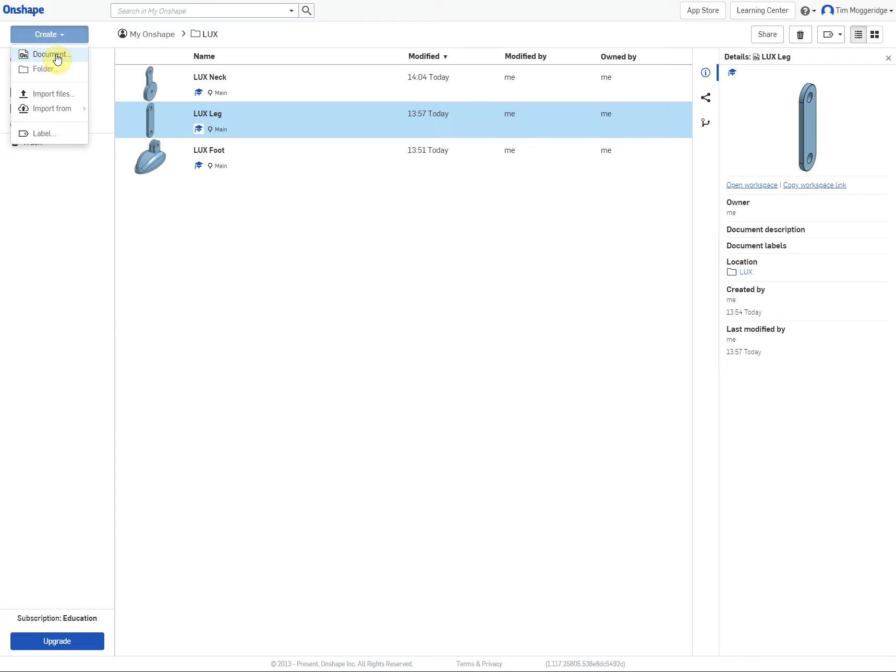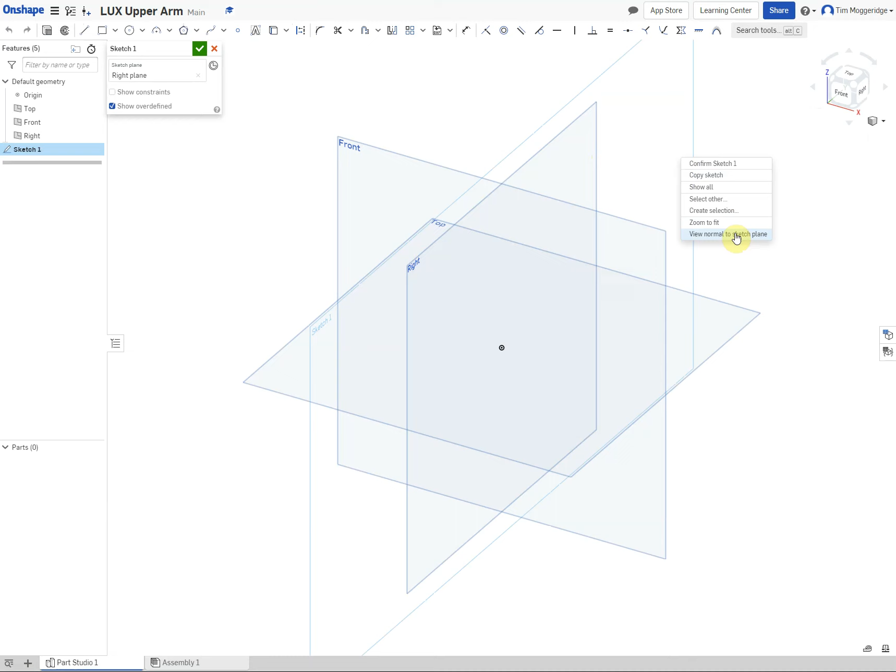So I'm going to create a new document. I'm going to give it a name of LUX upper arm, and that will take us into the modelling views. So as before, I'm going to pick the right work plane, right click on it, new sketch, right click and view normal to sketch plane, and we're going to start off with some circles again.

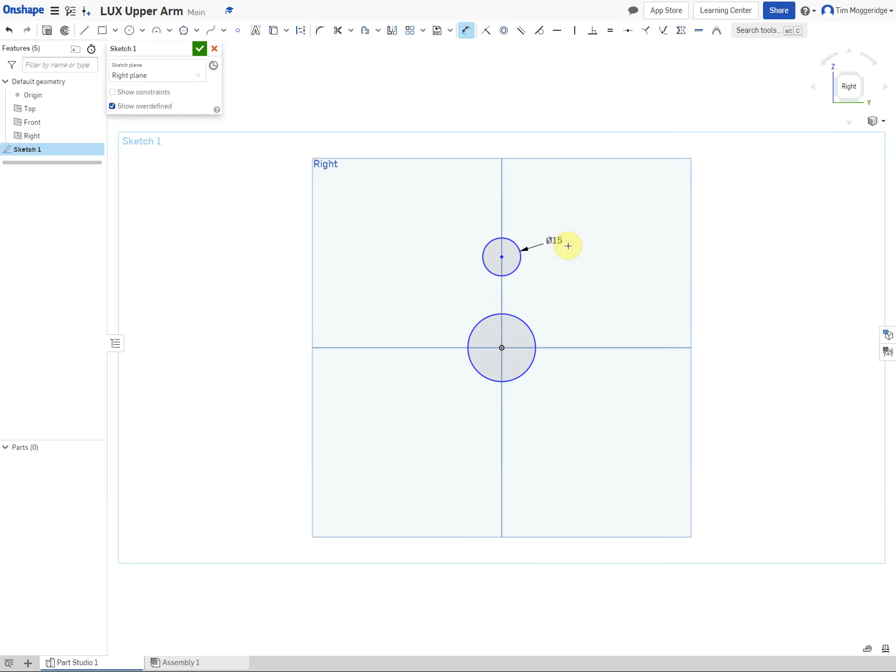So I'm going to start down the bottom and draw a circle, and then up above, making sure I'm lined up with the origin, draw another one, and I will dimension these. So use the dimension tool. The top one I want to be 15 millimeters, and the bottom one I want to be 20 millimeters. And now I'm going to dimension to the centers, and I want those to be 40 millimeters apart from each other.

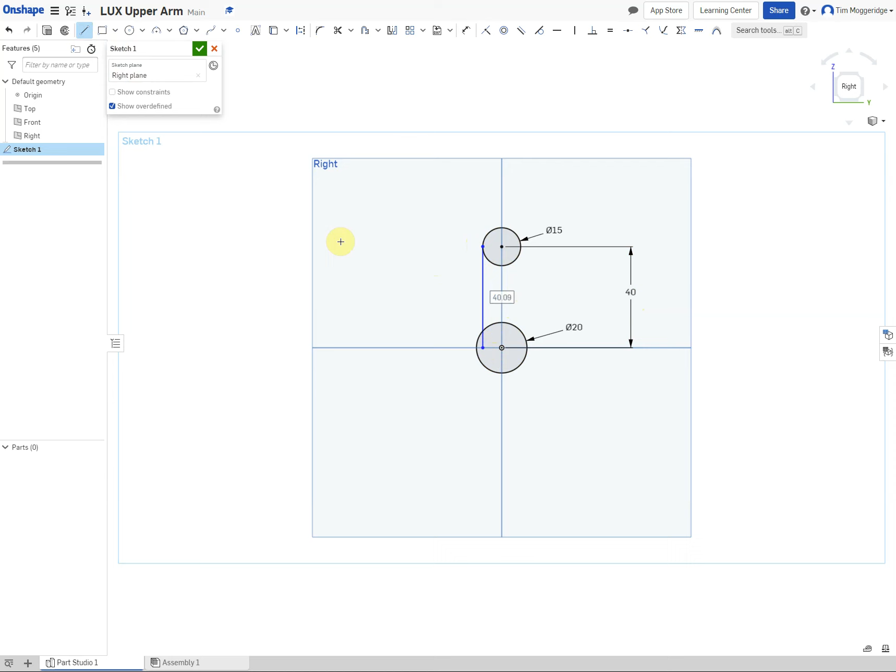I'm now going to use the line tool, and I'm just going to pick the right hand edge of that circle and draw a vertical line, and then I can mirror that one if I so wish. Let's do it that way. So just pick the other side, come down, make sure it stays vertical. You can see that from the little dialogue that appeared there.

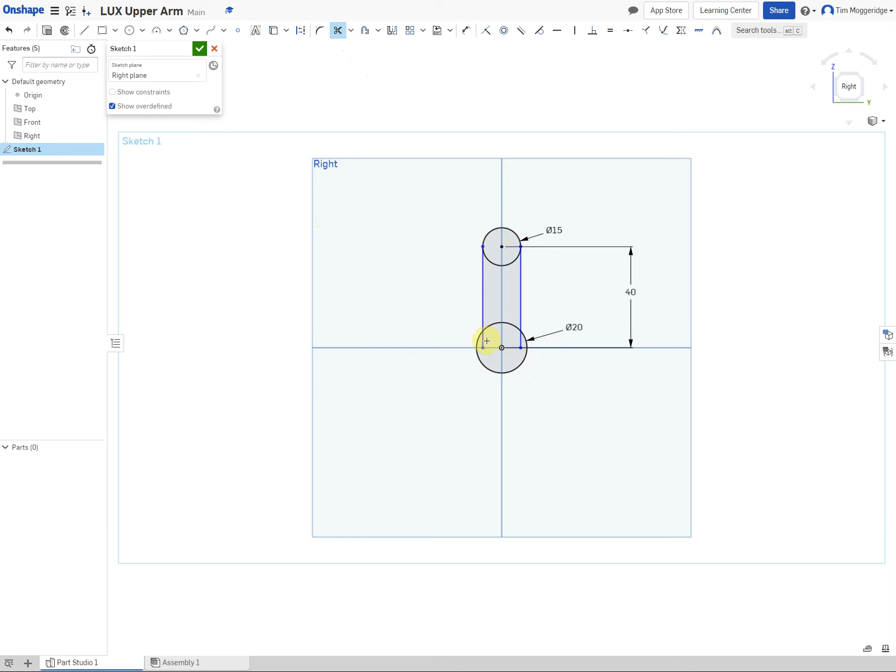And now I'm going to trim off the bits that I don't want. So with the trim tool, I'm going to trim the bottom of the vertical line, and I'm going to trim out the insides of the two circles. So that's my shape that I want. Looks a bit like the thermometer you see sometimes outside churches when they're trying to raise money for a new roof. Let's add in a couple of holes for that as well.

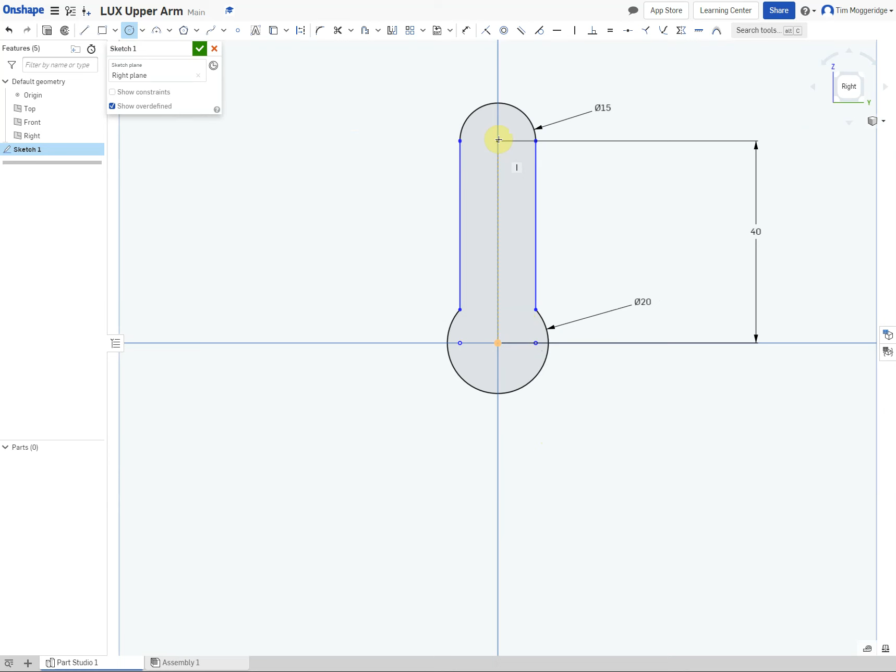So zooming in with the mouse wheel, hole there and a hole there. So those two circles I'm going to dimension to 6 millimeters. And we have our basic shape. So I'm now going to extrude this 3 millimeters. So use the extrude tool.

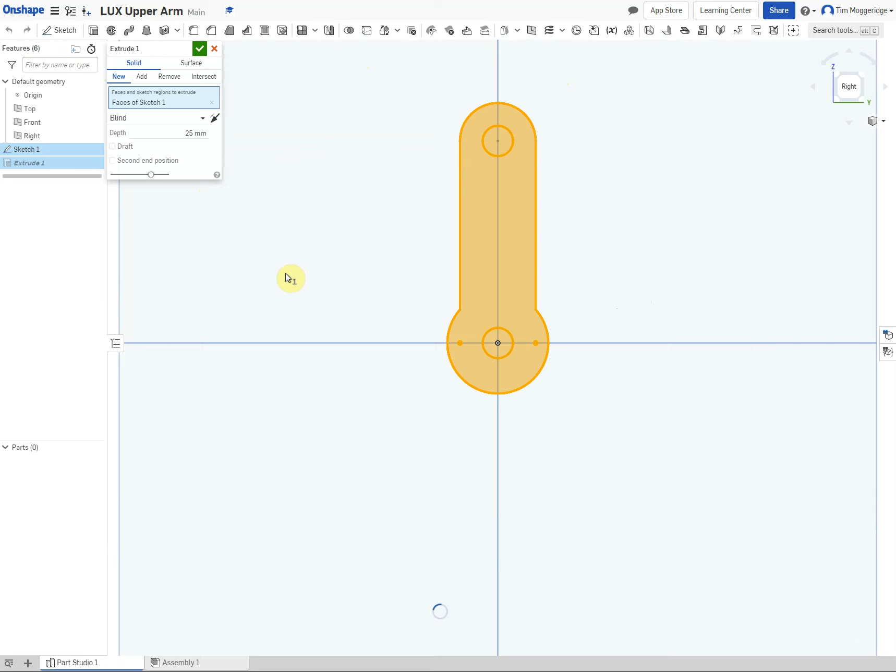I'm just going to spin that around using the right mouse button. So I want that to be 3 millimeters thick, but I want it to be symmetrical. So I'm going to click on the arrow by blind and make that symmetric. And hopefully the reason for this will become apparent as we go through. So I'm going to click on the tick to say I'm happy with that.

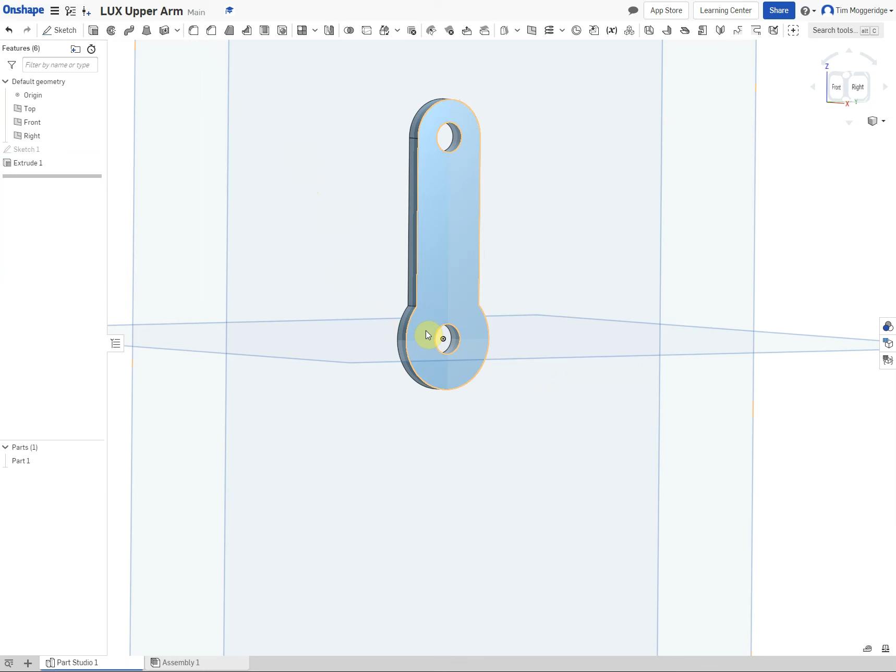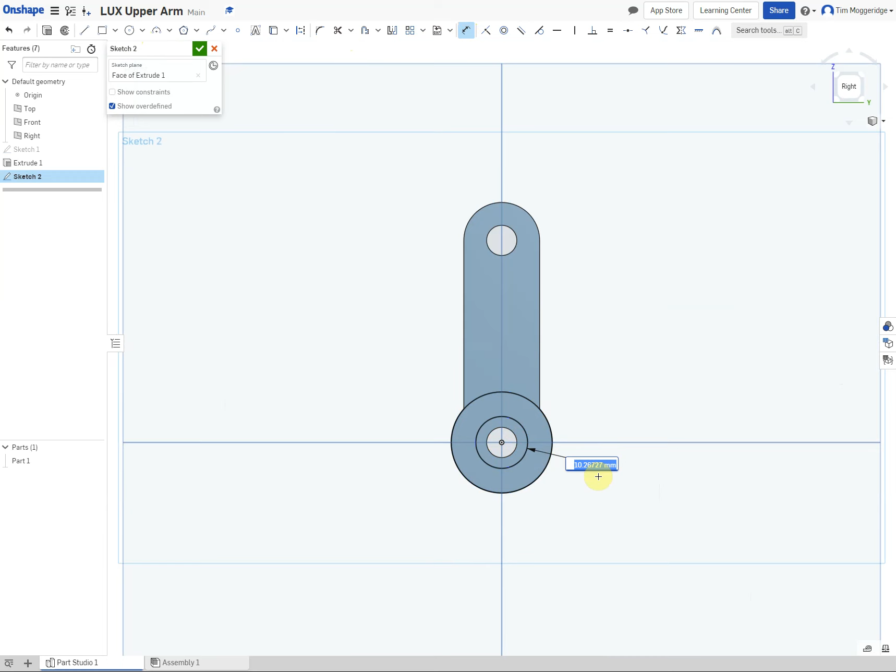I'm now going to click on this surface with the right mouse button and select new sketch, and then I'm going to view normal to the sketch plane. And as we did with the neck, I'm going to draw a circle that comes out to the outer circle, and I'm going to draw the inner circle as well. I'll do it oversized so that I can dimension it and make that 6 millimeters. So we're going to create a boss.

So we're now going to extrude that, and this time we're going to extrude that 1.5 millimeters. So type in 1.5, press tab to see it update. So you can see how that's created a little boss, and I'm going to click on the tick. Now I want to do the same on the other side. Now because this part is symmetrical around this work plane, I can actually mirror that last feature, so I don't have to redraw it on there.

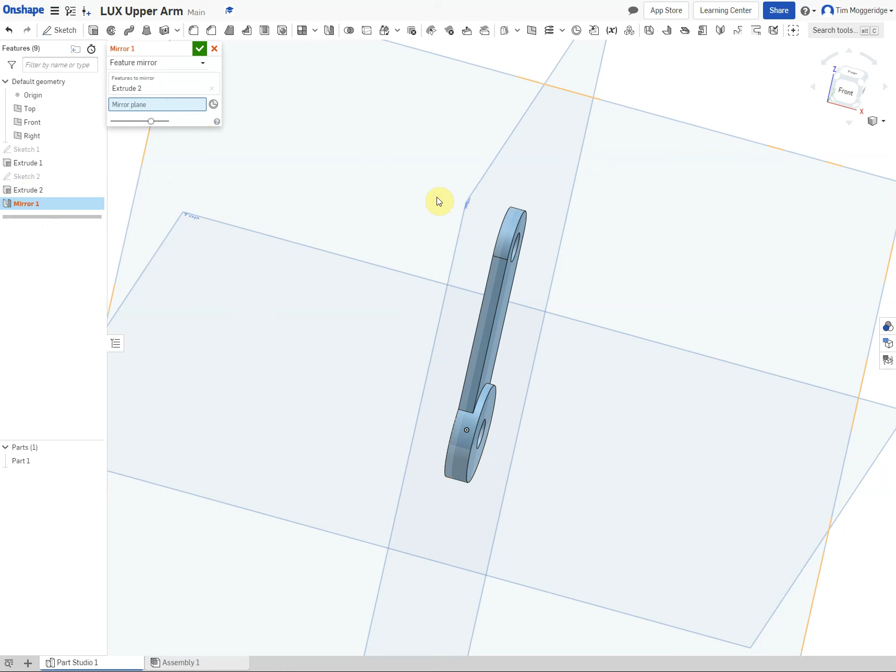So if we go over to the mirror tool, now it's asking me entities to mirror, and it's got part mirror up there. What I need to do is change part mirror to feature mirror. If I now just click on that feature, I could do it here or I could do it over here on the extrude 2. Click on the mirror plane, and I'm going to click on the work plane, and you can see that it's drawn that other side in because it's mirroring that feature. So click on the tick, and that is the upper arm drawn.